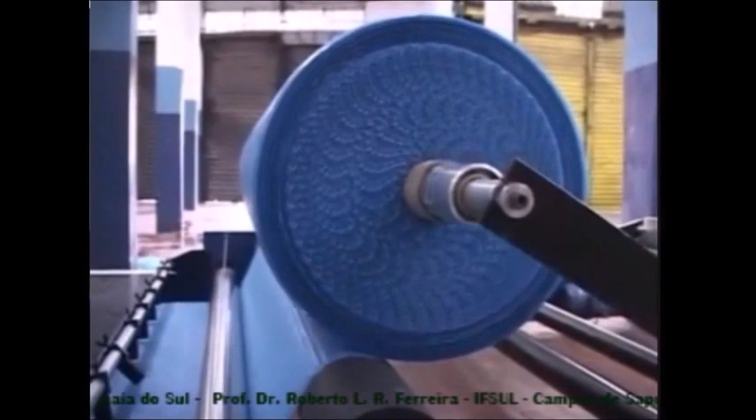Outro vídeo, que eu lembrei que não tinha mostrado. Nós vimos um vídeo a respeito de tubos corrugados, né? Tubo corrugado para agricultura também, mas existem mangueiras espiraladas, muito utilizadas, uso doméstico em geral, e tem outras mangueiras, muito usadas na indústria, que são mangueiras com reforço de arame de aço. Vou mostrar 2 vídeos aí para vocês, então.

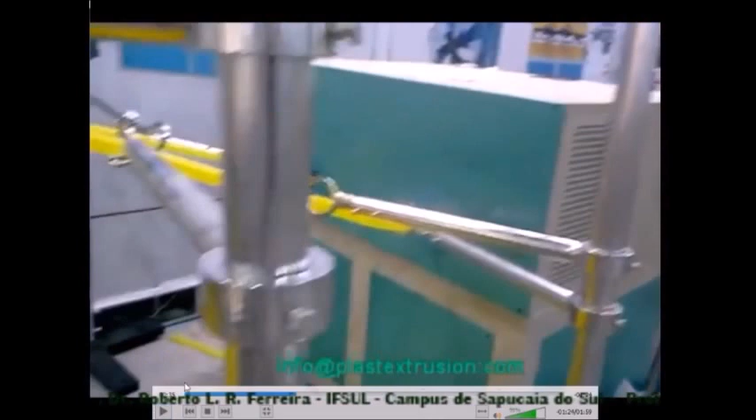Isso aqui é a apresentação do equipamento numa feira, né? Vocês vejam que tem uma pessoa sentada na mesa ali, aguardando visita, né? É uma máquina de cabeçote duplo, com coextrusão.

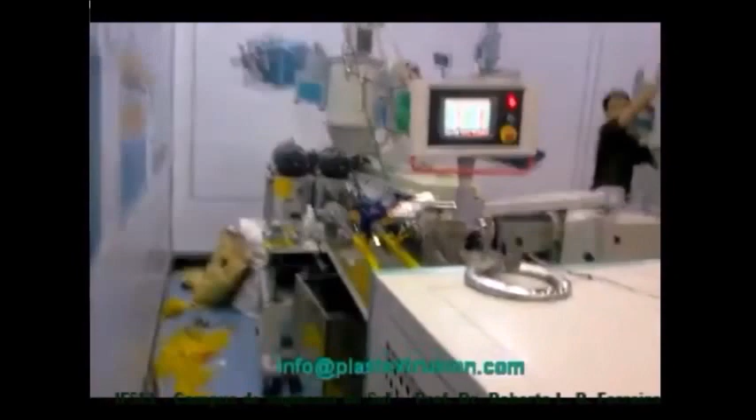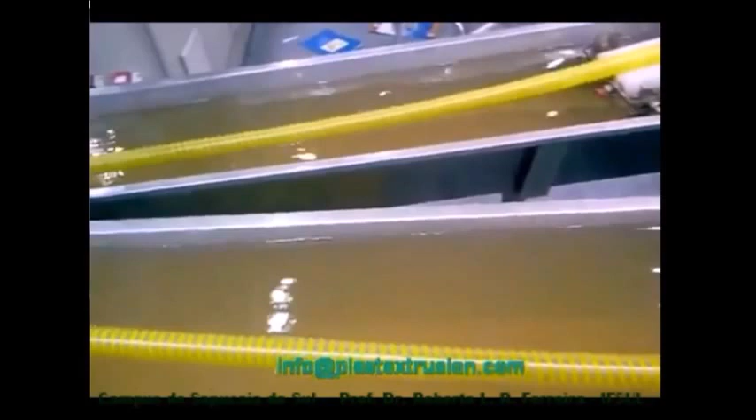Aqui, ó, tem uma extrusora e tem outra extrusora a 90 graus. E vai sair num cabeçote duplo de coextrusão, então vai formar 2 mangueiras. Aqui existem 2 motorredutores também, tem as polias de transmissão lá atrás, ó. E esse é um conjunto cônico, e aqui vão presos umas espécies de umas molas, os sem fins, que estão sempre girando, tá? Tem um conjunto engrenado aqui que faz girar cada uma dessas molinhas. Então essas molas é que vão fazer a propulsão.

Quando sai o perfil lá do cabeçote, essas molas vão girando e vão fazendo ele enrolar e soldar um no outro aqui. Em seguida são resfriados e colocados em banheira. E esse negócio vai seguindo adiante e tem um puxador duplo adiante. E depois, em vez de bobinar, eles têm uns tambores lá, tipo de umas centrífugas, né? Que estão sempre girando para ir enrolando a mangueira. Tá? Então, depois isso aqui vai ficar mais evidente no outro vídeo, com o reforço de arame de aço, dá para ver melhor isso aí.

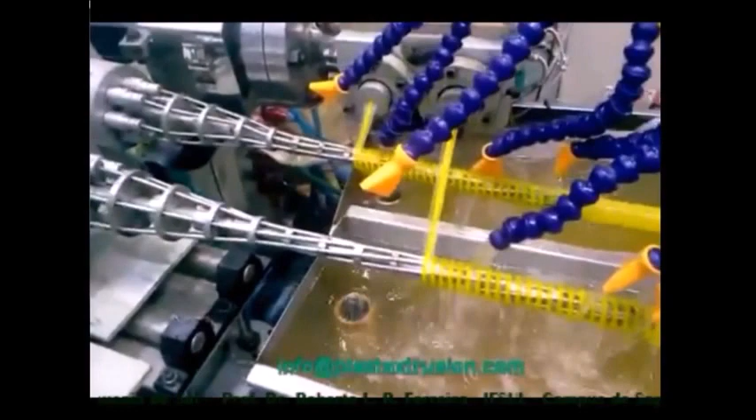Vejam que aqui, ó, a coextrusão, na verdade é uma biextrusão, né? Ela sai um material transparente e um amarelo. E ele vai soldando um no outro, ele vai formando uma espiral. Ele vai soldando uma camada na outra aqui, porque ele está saindo fundido ainda, né? Então isso aqui girando força ele a fazer uma solda e vai formando uma mangueira espiral. Vamos adiante.

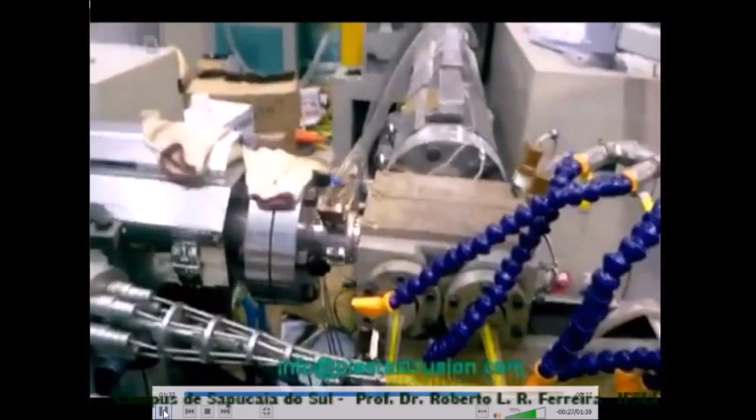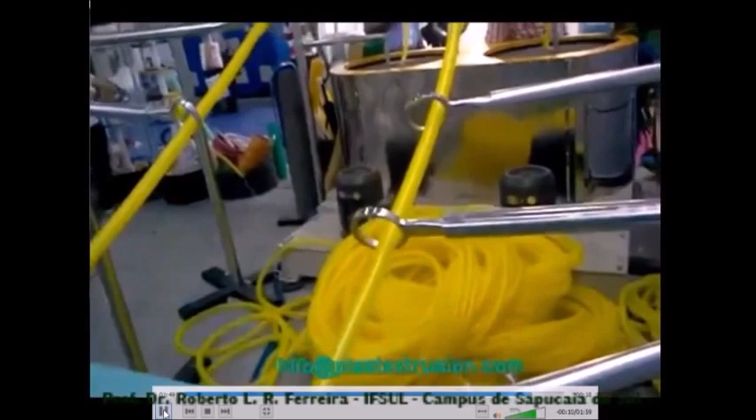Aqui está o conjunto de puxador, né? Que deve ser sistema de lagarta, de correia caterpillar. E depois os tambores onde vai armazenada a mangueira. Tem uns olhais aí de guias, né? De passagem da mangueira. E aqueles 2 tambores ao fundo lá são como uma espécie de uma centrífuga, então tem motorização para fazer eles girando e vai acumulando a mangueira lá.

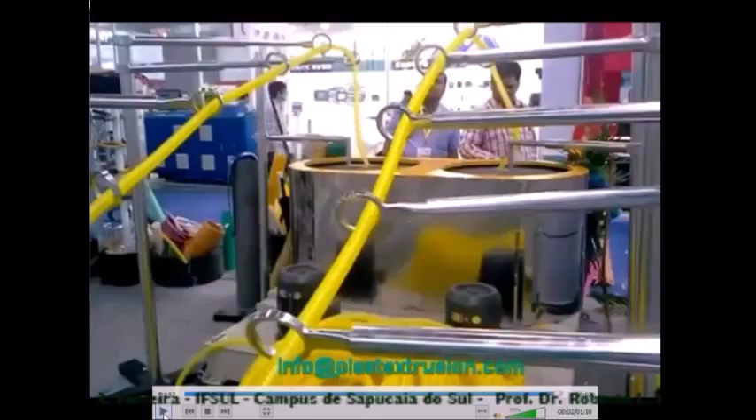Agora vamos ver um que é com reforço de arame de aço, existe muita aplicação na indústria para isso aí. A extrusora está colocada lá, ó, tem um cabeçote, tipo aquele cabeçote para encapamento de fio, né? Só que nesse caso aqui dentro tem um carretel de arame de aço e tem um fuso que vai jogando esse arame de aço para dentro do cabeçote e ele vai saindo extrudado junto com a mangueira.

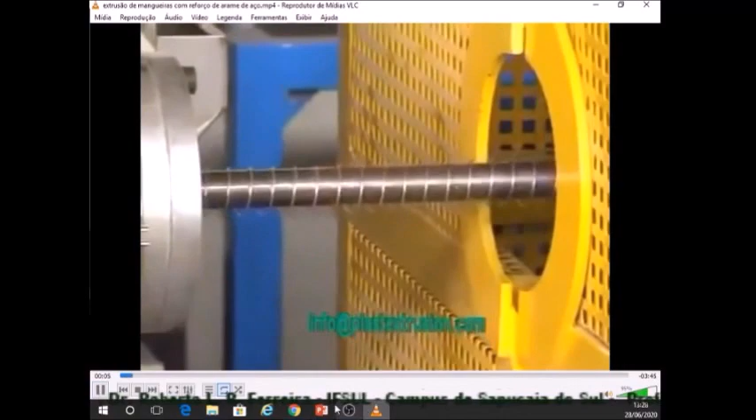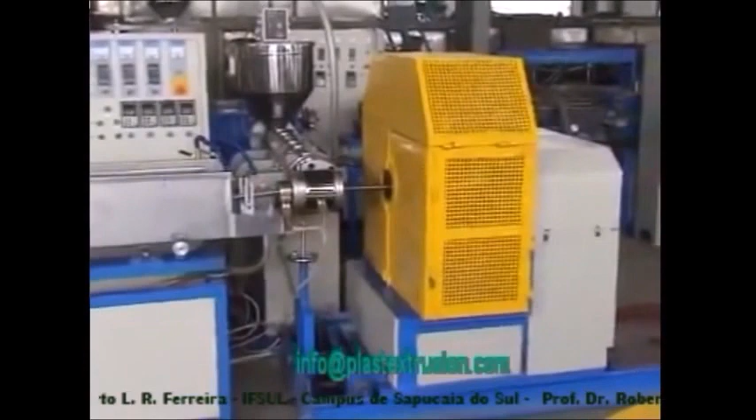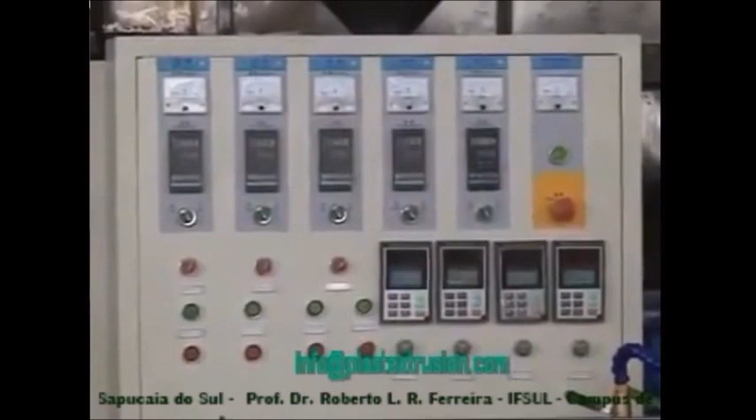Então, aqui está o fuso jogando o arame de aço para dentro, por dentro do cabeçote, e lá está a extrusora e vai colocando a mangueira, vai ficando a mangueira revestindo com um arame de aço de reforço. Banheira de resfriamento e depois vai vir um puxador Caterpillar ali, de lagarto.

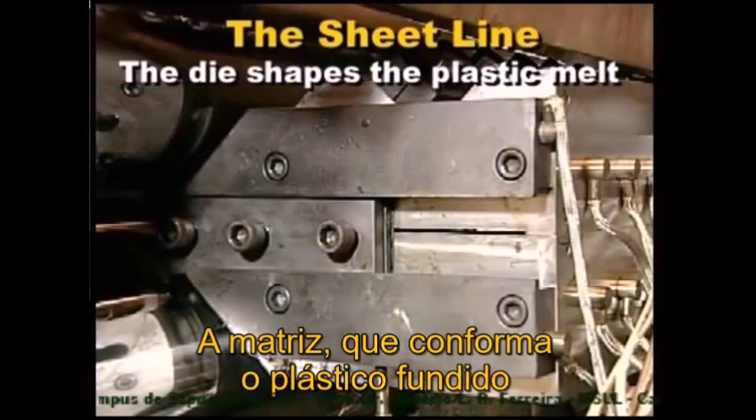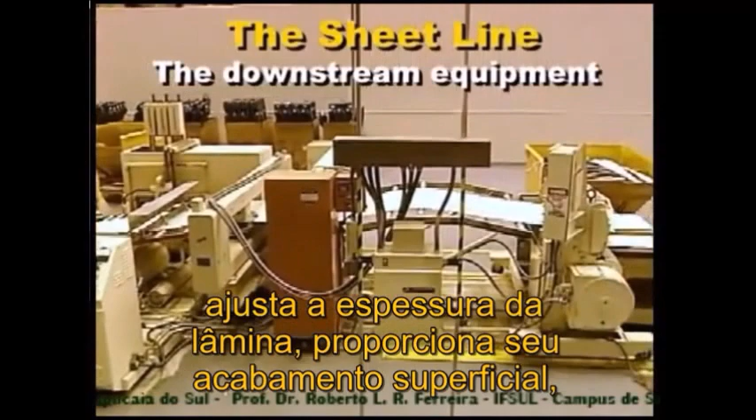There are 3 main parts of a sheet extrusion production line. The extruder, which melts, mixes, and conveys the plastic; the die, which shapes the melted plastic; the downstream equipment, which pulls the plastic from the die, adjusts sheet thickness, imparts a surface finish, cools the plastic, conveys, trims, and cuts or winds the finished sheet.

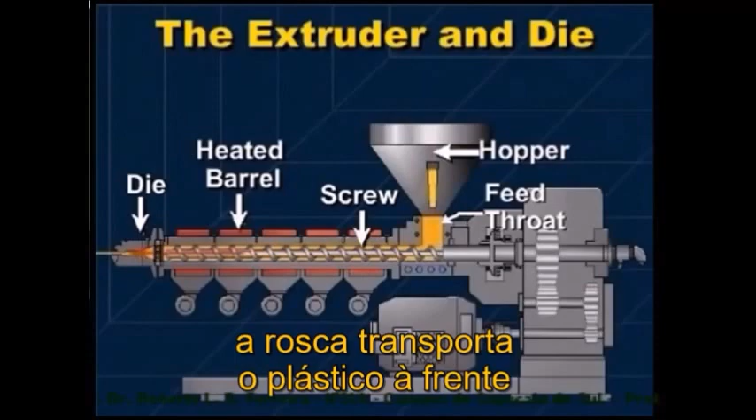This is a cutaway drawing of a single screw extruder. Plastic raw material is fed from the hopper through the feed throat and onto the rotating screw inside the heated barrel. The screw conveys the plastic forward. The plastic is melted and mixed, and its pressure is increased.

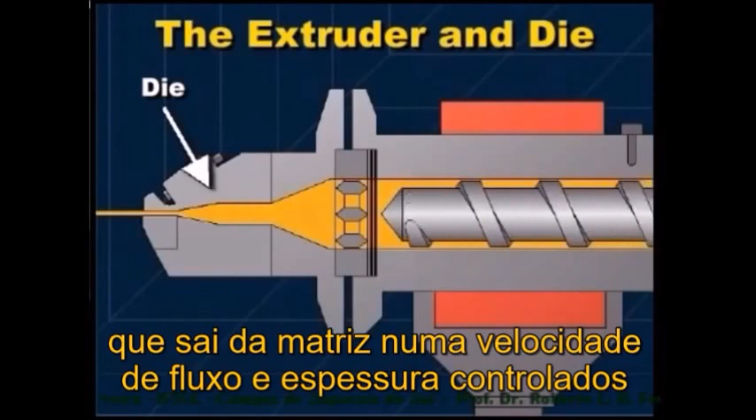The pressure forces the plastic, now called a melt, to flow into the die. The die shapes the melt into a molten flat sheet that leaves the die at a controlled thickness and flow rate. The plastic melt, as it leaves the die, has a putty-like consistency.

In sheet production, 1 or more extruders can be used to supply melt streams to the die. In monolayer extrusion, 1 extruder feeds 1 type of plastic to the die. In multi-layer extrusion, often called co-extrusion, 2 or more extruders feed different plastics.

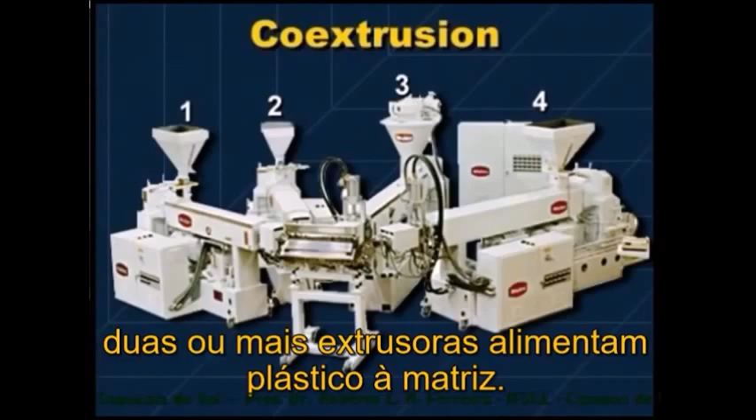While the design of the manifold and preland can even out much of the flow rate differences in a die, additional control adjustments are often needed to produce sheet of uniform thickness. Control adjustments are made by the use of restrictor bars and adjustable die lips, or both. These adjustments work by changing the height or thickness of the flow passage.

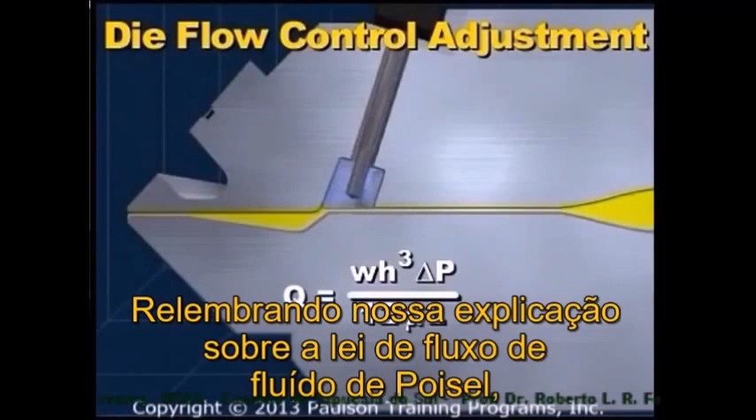Remember from our explanation of the Poiseuille fluid flow law that changing the height of the flow passage has an effect on flow to the 3rd power. This effect will be the greatest when the height of the passage is smallest, as in dies producing thin sheet.

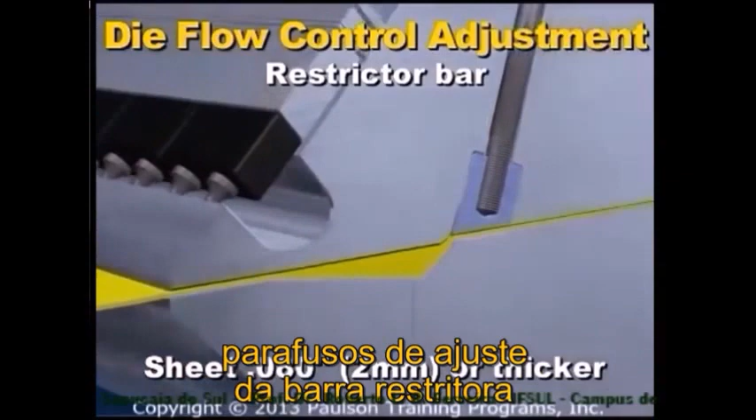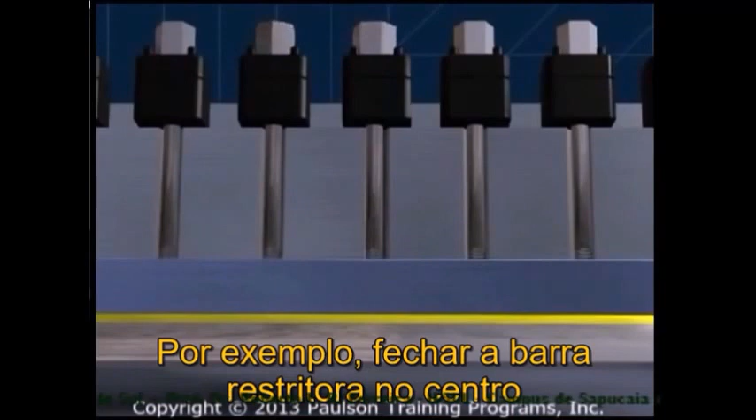For thick sheet, the restrictor bar adjustment is used to make major changes in the flow rate inside the die. Adjustment bolts on the restrictor bar allow flow passage height to be changed in specific areas across the die. For example, closing the restrictor bar in the center will reduce the passageway thickness and decrease flow rate. Flow is diverted to where there is less resistance away from the center.

Restrictor bar adjustments do not provide as fine a flow adjustment as the flexible lip. The restrictor bar is stiffer than a flexible lip, and the adjustment bolts are heavier and placed farther apart, typically 3 inches on center.

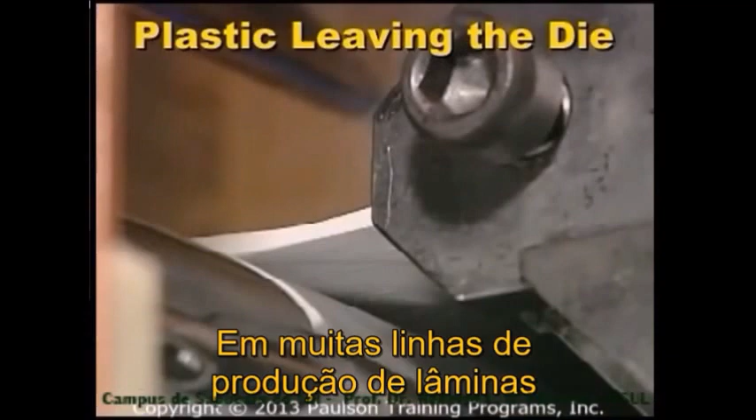Now the plastic reaches the nip of the first two rolls in the roll stack. In many sheet extrusion lines, it is common practice to build a small amount of plastic, called a bank or a bead, ahead of the nip. The bead is a reserve of plastic that compensates for small variations in extruder output or small roll stack speed variations. The bead should be kept small and uniform so a steady pressure is maintained at the nip.

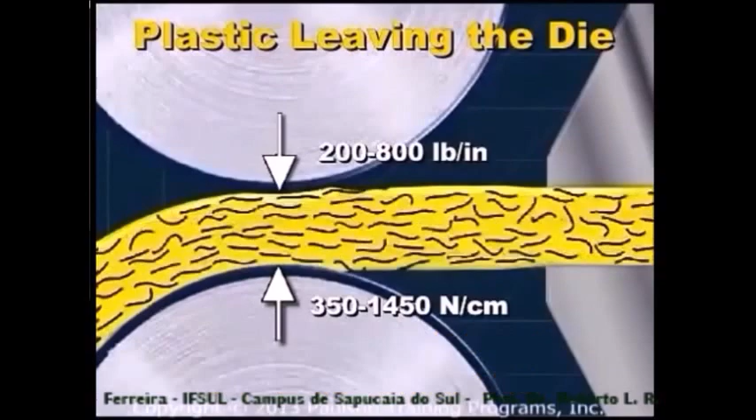The plastic now enters the gap between the first two rolls in the roll stack. The pressure on the plastic in this gap depends on the plastic's viscosity. It's typically from about 200 to 800 pounds per linear inch, or 350 to 1450 newtons per linear centimeter. The roll pressure causes the molecules to be compressed and to flow as the plastic is squeezed between the rolls. These two effects can cause stress in the surface of the sheet.

If the roll speed is set to the exact speed of the plastic leaving the die, the plastic will have the least molecular orientation. If the speed of the rolls is set faster than the rate of the plastic leaving the die, the web will be stretched or drawn down. Molecular orientation in the extrusion direction will occur.

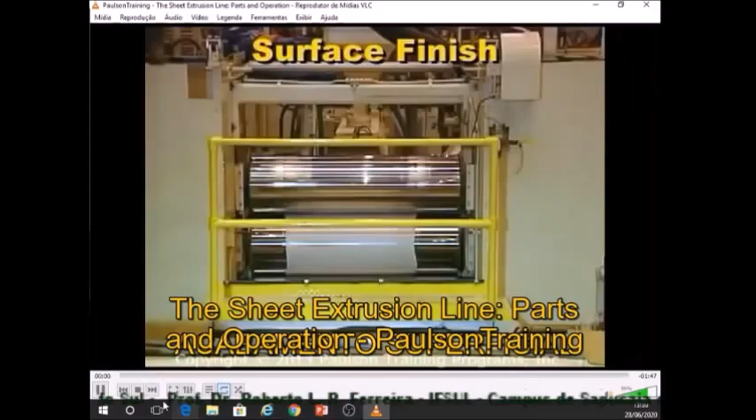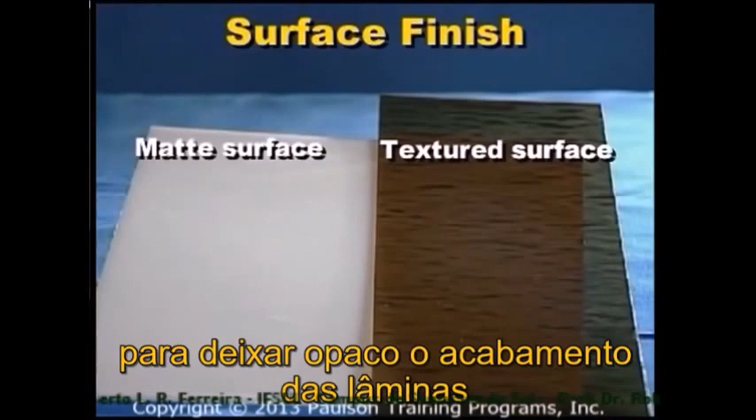The surface finish of the rolls determines the surface finish of the sheet. There is a wide variety of roll finishes available. Smooth rolls, often called polish rolls, are chrome-plated and have a mirror finish. They produce smooth, glossy sheet. Rolls can also have a matte finish to dull the sheet's surface, or an embossed textured finish to give the sheet a textured or patterned surface.

Roll diameters typically range from 6 to 30 inches. The finishing rolls have a double shell construction with cooling channels running between the inner and outer shell of the roll. A fluid, usually water, is continuously circulated in the channels to cool the rolls, which absorb the heat from the plastic. Because of this, the rolls are often referred to as chill rolls.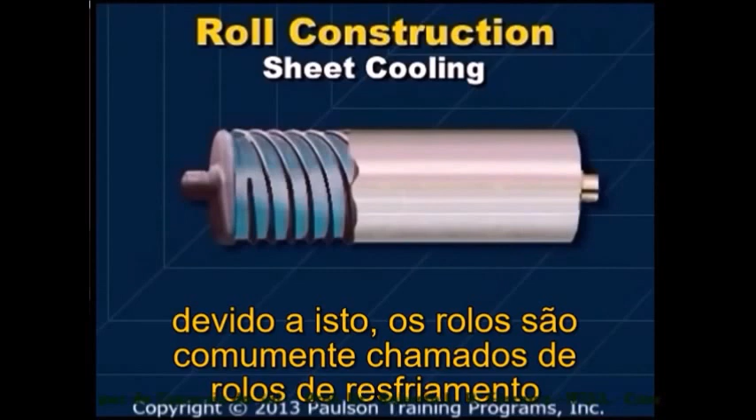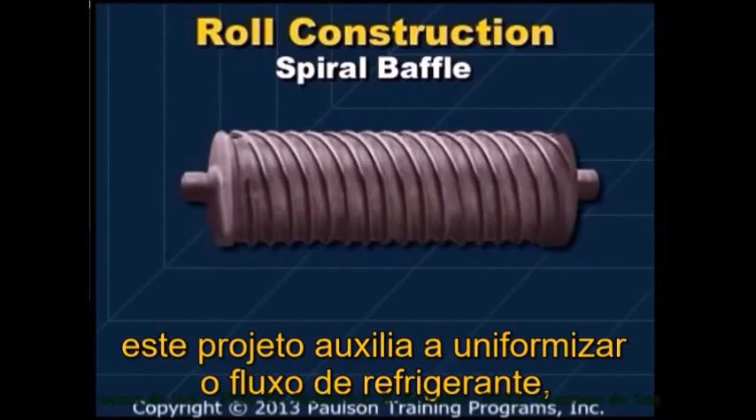A common chill roll design is the spiral baffle, shown here. This design helps even out the coolant flow, which minimizes temperature variations across the surface of the roll. Temperature differences will cause shrinkage variations in the sheet, so the temperature variation across the roll face should be as small as possible, usually no more than 3 degrees Fahrenheit, about 2 degrees Celsius.

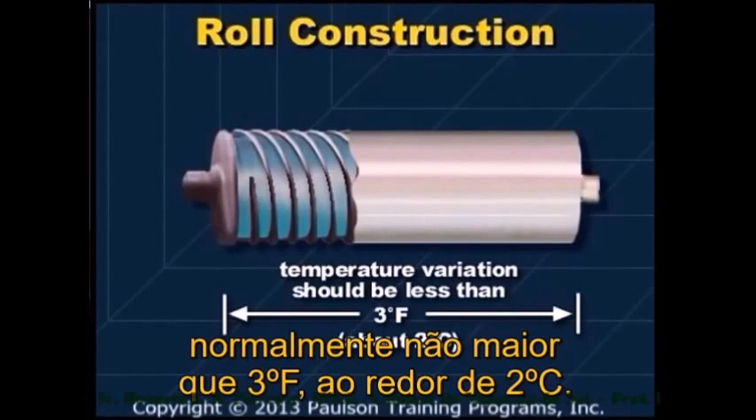Because the temperature of the coolant increases as it circulates through the roll, the volume of the coolant must be high enough to keep the temperature rise to a minimum. The coolant flowing through the rolls must also be free of contaminants, which could build up in the baffles and reduce the cooling efficiency.

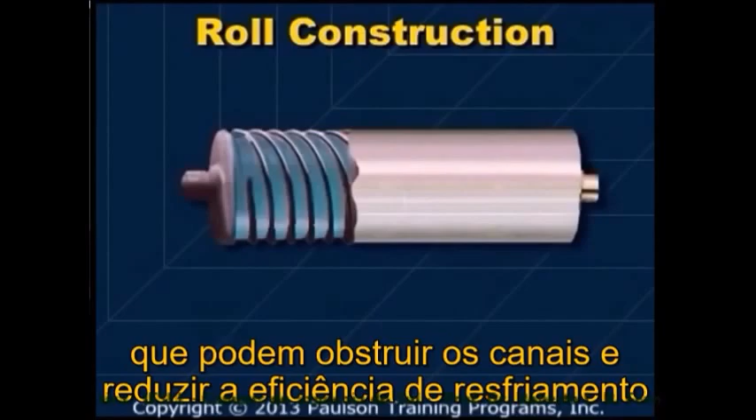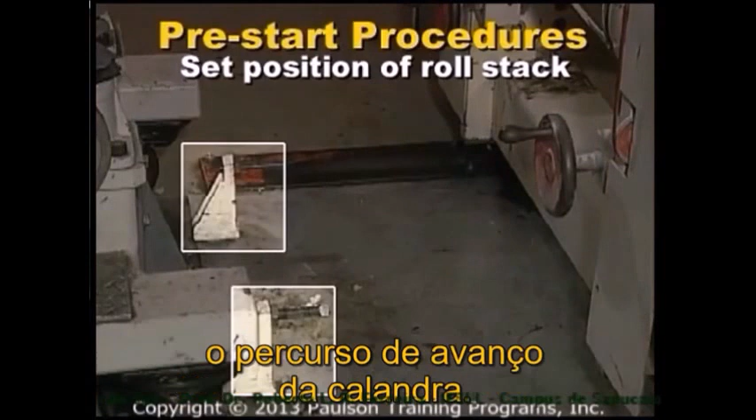Check that the stops are set so the rolls cannot touch each other. Next, set the position of the roll stack. The roll stack is usually set very close to the die during operation, but the rolls must never touch the die. Positive stops must be set to limit the forward travel of the roll stack. Next, check that the threads and lock nuts on all the stop devices are clean and properly lubricated.

After checking the roll stops and setting the position of the roll stack, move the roll stack away from the die to make room for threading the web.

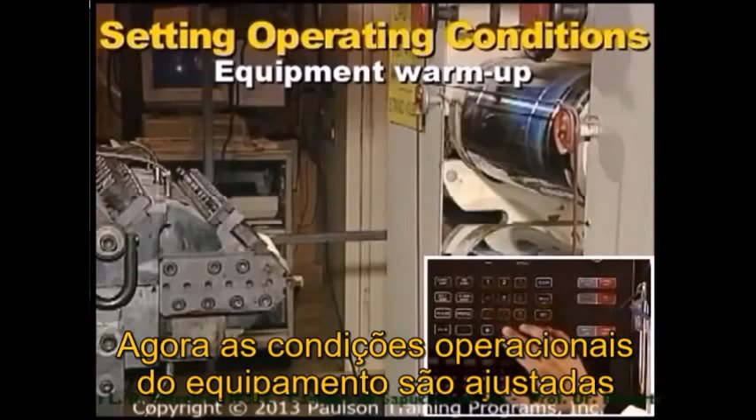Now the operating conditions for the equipment are set. All the equipment that operates at a specific temperature must be warmed up. The die must be thoroughly heated before extrusion begins.

Die heat-up can be done online with a die in place or offline on a sturdy support. A new die, or one that has been in storage, should be brought up to its operating temperature slowly, and then allowed to heat soak for 1 hour at operating temperature. This is done to allow the die heaters, which can pick up moisture when they are not in use, to dry off slowly during heat-up. Moisture in the heaters can cause premature heater failure.

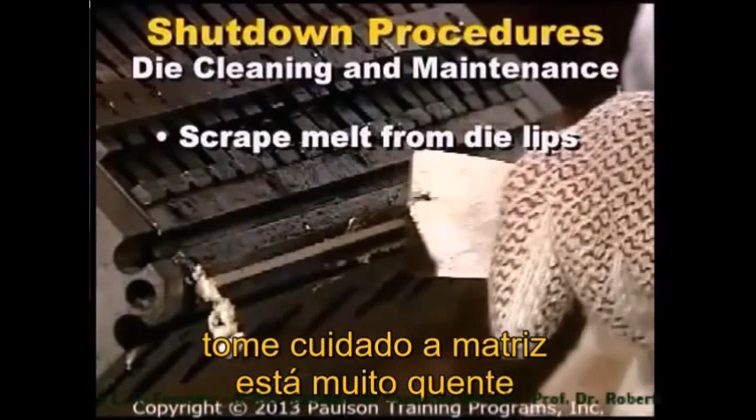After the melt has stopped flowing from the die and the downstream equipment has been shut down, move the roll stack away from the die so the face of the die can be cleaned. Be careful, the die is very hot, and also you don't want to scratch the die lips.

Wear insulating gloves. If the die is going to remain in use, a feed leader may be left depending on your procedures. Any scrap that has purged to the floor should be removed.

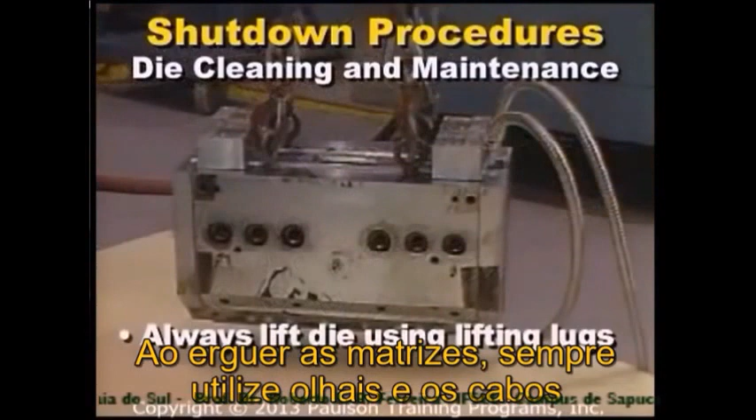If the die is going to be removed from the extruder for cleaning or maintenance, this should be done when it is hot. Each plant should have procedures in place for removing and handling dies. Die stands, transfer tables, and/or cranes are often used, depending upon the weight and size of the die. When lifting dies, always use the lifting lugs, which are designed to keep the die in a balanced position.

To clean the die, first make sure the electrical power is off. Then you can loosen all the body bolts. Next, use jack bolts to split the die apart. When the die is split, lift the die half off the dowel pins.

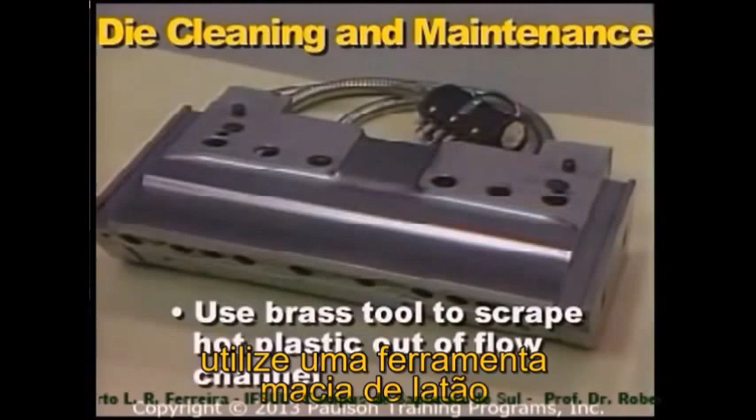Use a soft brass tool to scrape out the hot plastic in the flow channel. After the plastic is scraped out, the flow channel is polished.

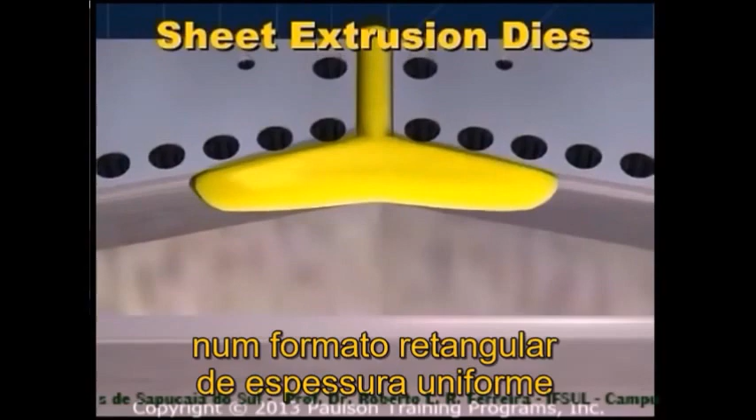In this lesson, we'll describe sheet dies and the flow of plastic melt through the die. The job of the sheet die is to shape the hot putty-like plastic melt from the extruder into a flat rectangular web of uniform thickness to feed into the roll stack.

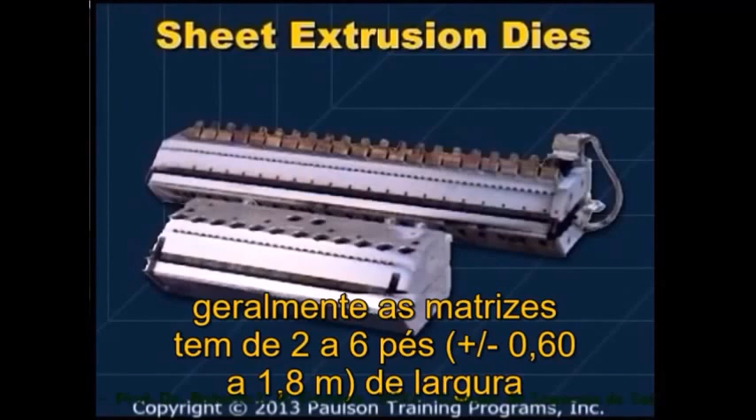Sheet die designs vary depending on the required sheet thickness, the characteristics of the sheet being produced, the type of plastic used, and the allowable cost. Sheet dies can be of various widths. Typically, sheet dies are 2 to 6 feet wide, but they can be as wide as 10 feet.

Typical sheet dies operate at temperatures from about 360 to 600 degrees Fahrenheit, that's 182 to 316 degrees Celsius, and inlet pressures up to 5,000 psi.

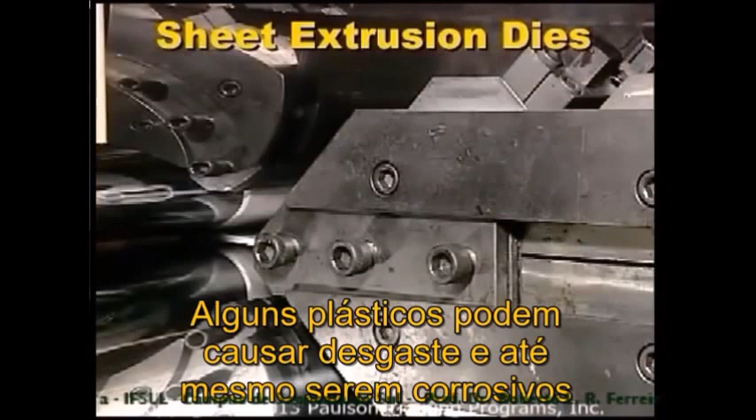Dies must be very rigid to avoid warping or clamshelling from high internal pressure. Some plastics can cause wear and even be corrosive, so the dies are usually made of chrome or nickel-plated tool steel. For certain applications, such as PVC, the die may be made from stainless steel.

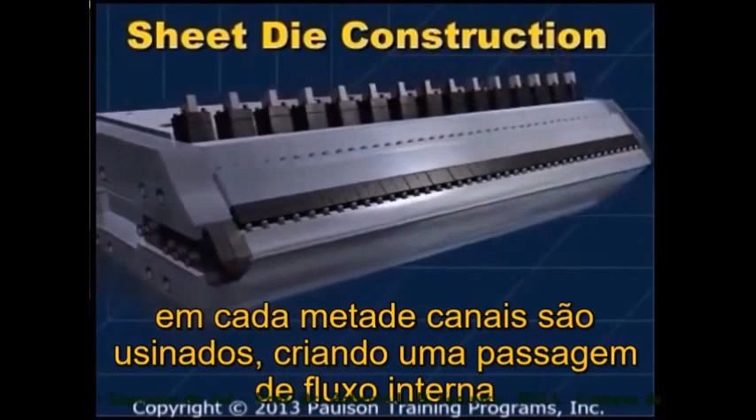Sheet dies have an upper and lower half. In each half, channels are machined to create a flow passage inside when the halves are put together. This flow passage consists of a primary manifold, a preland, a secondary manifold, and the lipland.

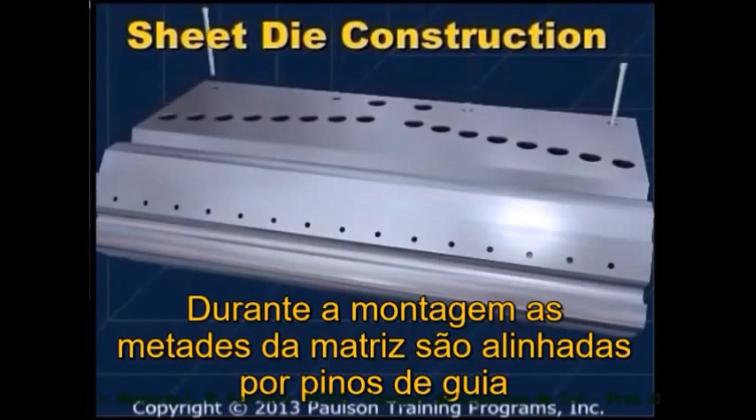The entire manifold is polished and usually chrome-plated for a smooth, wear-resistant surface. During assembly, the die halves are aligned with dowel pins and are held together with body bolts. High-temperature gaskets seal the two ends of the die to prevent plastic leakage.

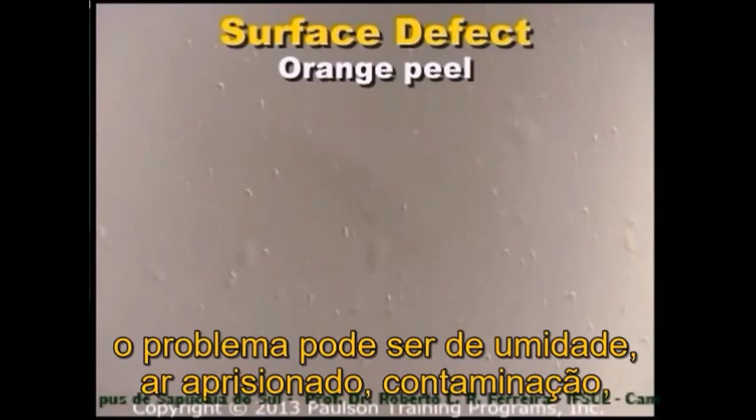This is a surface defect called orange peel. It's a rough and grainy surface that looks like the outside of an orange. The cause is localized uneven shrinkage. The problem may be moisture, air entrapment, contamination, too cold a melt temperature, or poor contact with the chill rolls.

Shark skin is a surface defect that looks like tiny ridges on the sheet. The surface roughness is caused by a tearing of the surface as the plastic leaves the die. The surface viscosity of the plastic melt is too high. The melt or the die temperature should be increased.

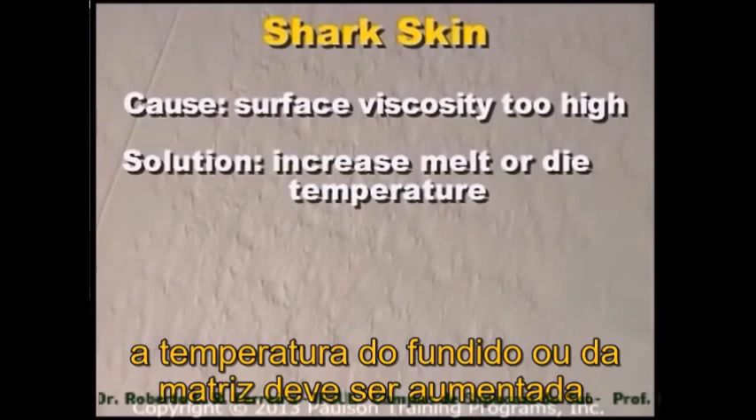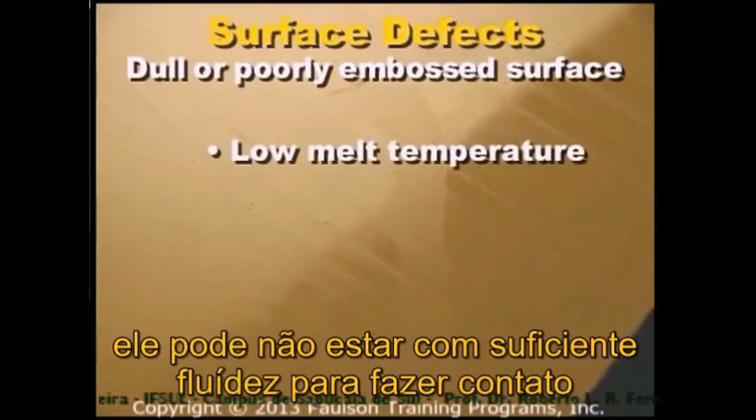Sometimes the surface of the sheet is dull, or if the sheet is embossed, it has poor surface detail. The reason is that the plastic surface is not picking up the roll surface. The problem may be a low melt temperature. The plastic may not be fluid enough to pick up the surface finish of the polishing roll or the embossing roll.

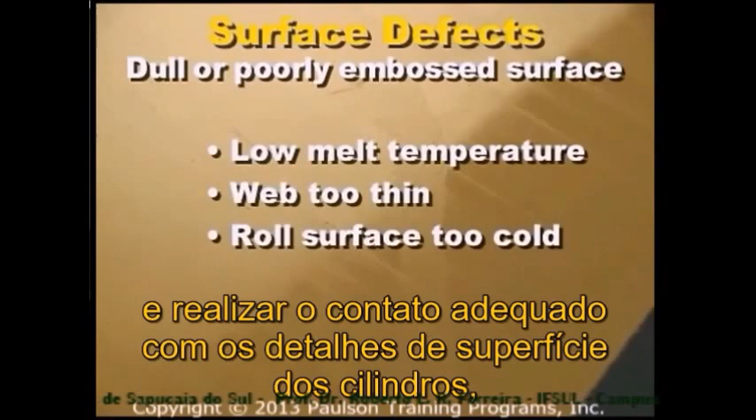The web may be too thin, so there is too little pressure on the plastic in the nip of the first two rolls. Another possible cause is that the roll surface may be too cold to allow the plastic to flow and pick up the surface detail of the roll. Or the speed of the last roll may not exactly match the speed of the sheet.